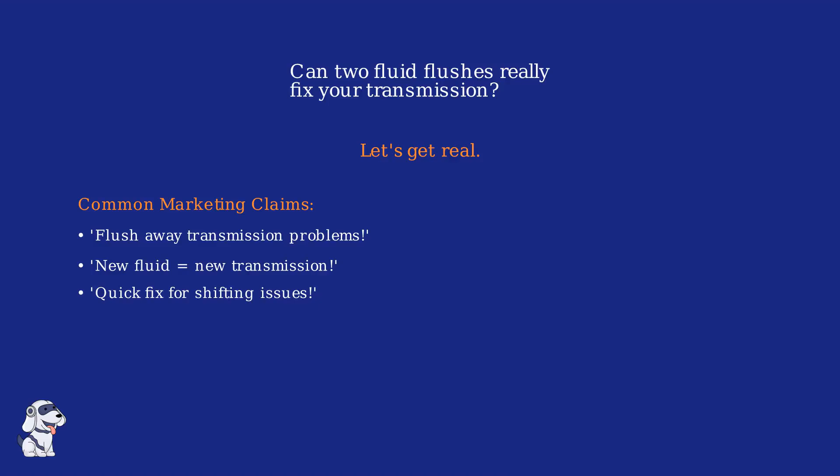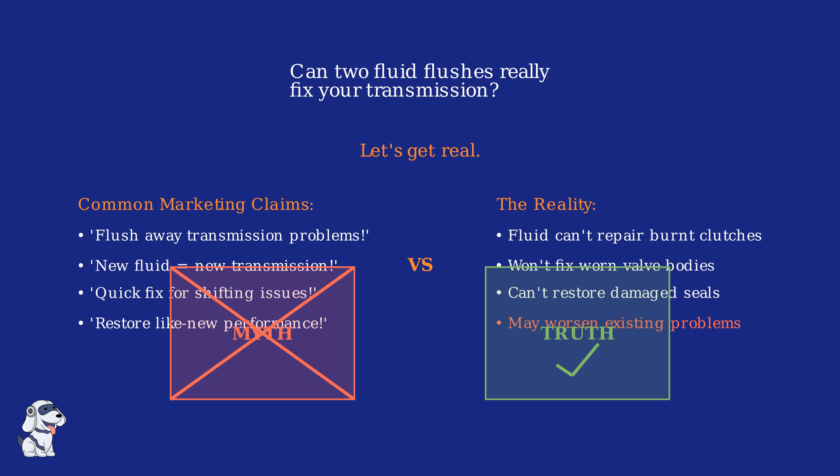Let's get real. Quick-lube chains and manufacturers push the myth that flushing transmission fluid will magically solve all your problems. The truth is, if your transmission is already damaged, new fluid won't repair burnt clutches, worn valve bodies, or damaged seals. In fact, flushing a neglected transmission can make existing problems worse by dislodging debris that clogs critical components.

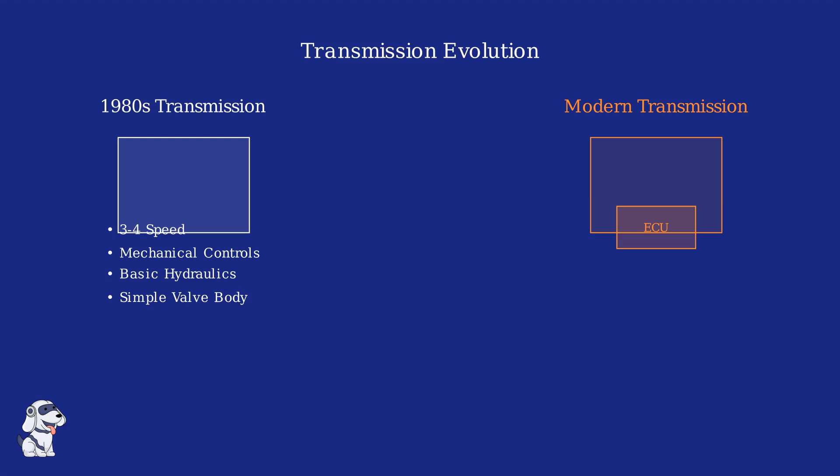Modern transmissions are more complex and fragile than ever before. While 1980s transmissions had 3 to 4 speeds with simple mechanical controls, today's transmissions feature 8 to 10 speeds, electronic management systems, adaptive learning, and dozens of sensors. This complexity creates tight manufacturing tolerances, electronic failure points, software calibration issues, and heat-sensitive materials that make modern transmissions far more vulnerable to problems.

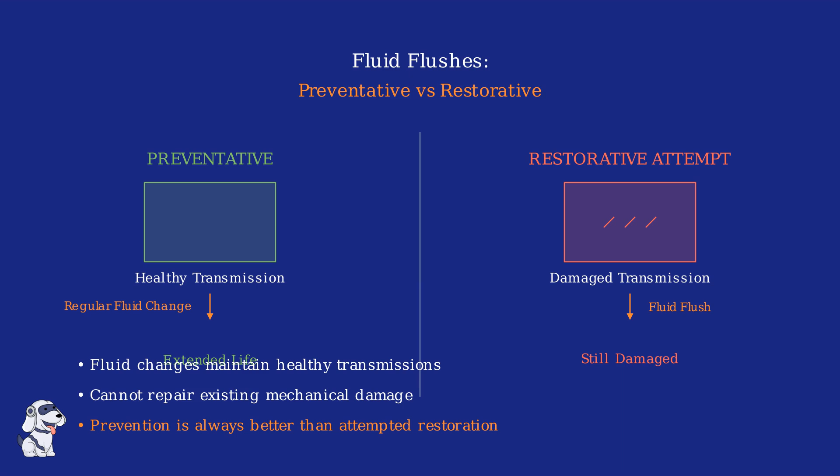Transmission fluid flushes serve one primary purpose: prevention, not restoration. A healthy transmission benefits from regular fluid changes that extend its lifespan. However, once mechanical damage occurs, no amount of fresh fluid can repair burnt clutches, worn gears, or damaged seals. The fluid flush becomes ineffective because the underlying problems are mechanical, not fluid-related.

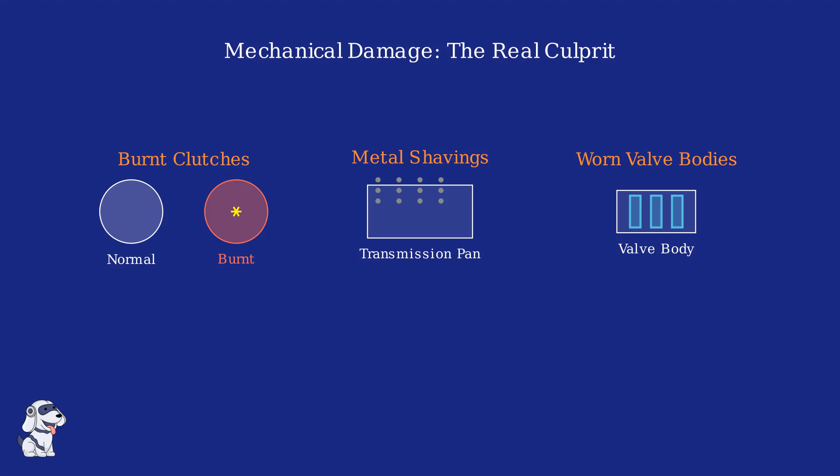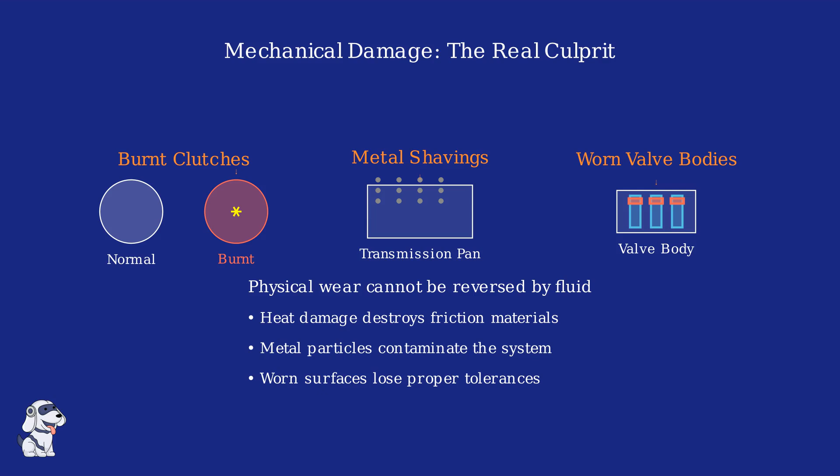Transmission damage occurs mechanically. Clutches burn from excessive heat, creating permanent friction material loss. Metal shavings accumulate in the oil pan from worn gears and components. Valve bodies develop scoring and wear that affects hydraulic pressure control. These physical failures cannot be reversed by simply adding new fluid.

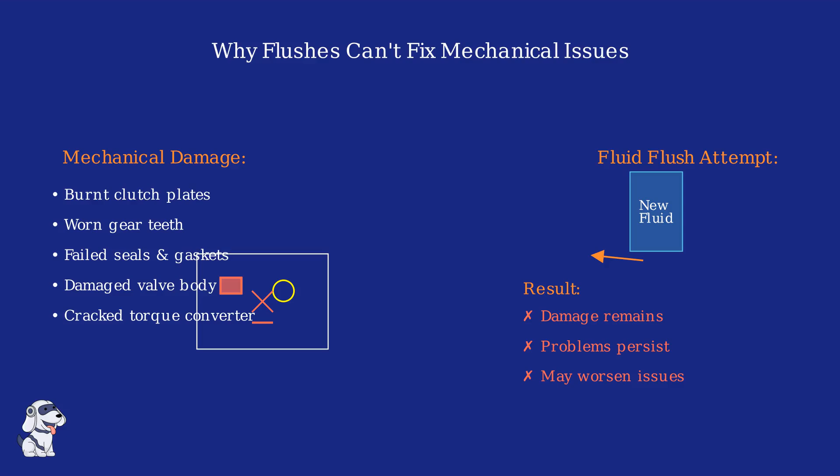Transmission damage occurs mechanically. Clutches burn, gears wear down, and seals fail. These are physical problems that new fluid simply cannot repair. It's like putting fresh oil in a blown engine. The underlying damage remains unchanged.

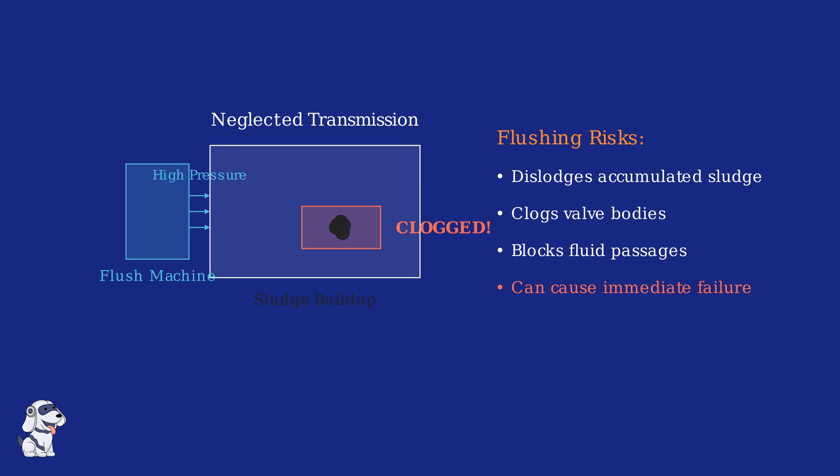Flushing a neglected transmission with years of sludge buildup creates serious risks. The high-pressure flush dislodges accumulated debris that then clogs valve bodies and fluid passages, often causing immediate transmission failure where none existed before. There's a crucial difference between a fluid change and a flush.

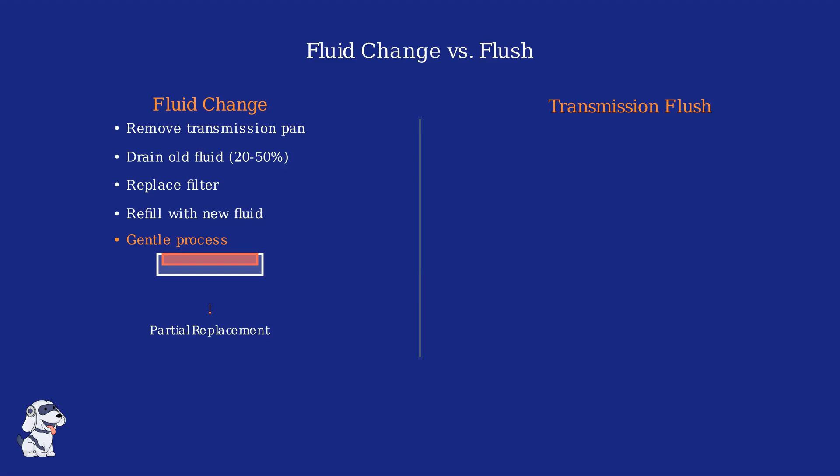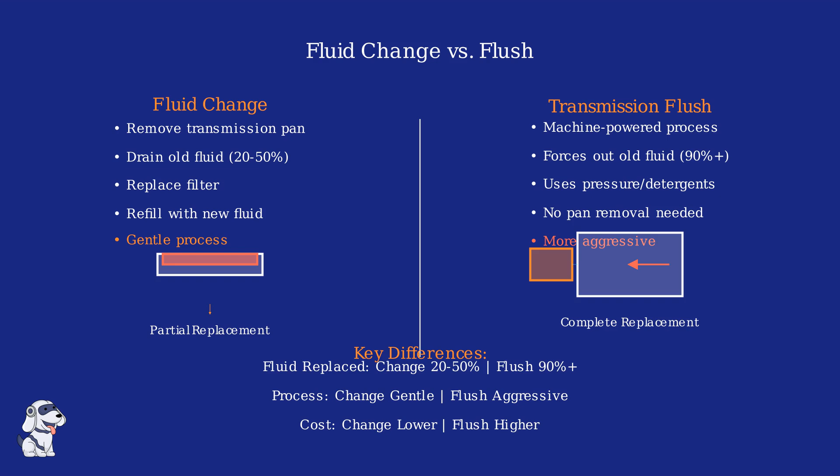A fluid change removes the pan, drains 20 to 50% of old fluid, replaces the filter, and gently refills. A flush uses machine pressure to force out 90% or more of the fluid without removing the pan. While flushes replace more fluid, the aggressive process can dislodge debris in neglected transmissions.

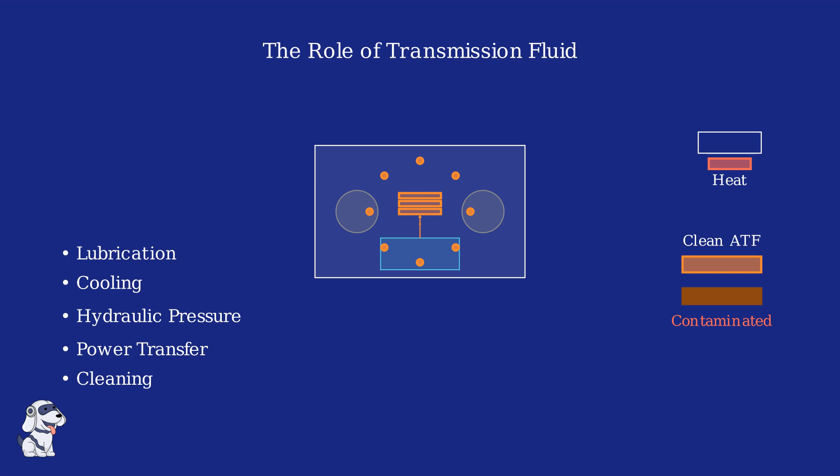Transmission fluid serves 5 critical functions in your transmission. It lubricates moving parts, dissipates heat, provides hydraulic pressure for shifting, transfers power through the torque converter, and carries away contaminants. When fluid degrades, all these functions suffer, but replacing fluid cannot repair mechanical damage that has already occurred.

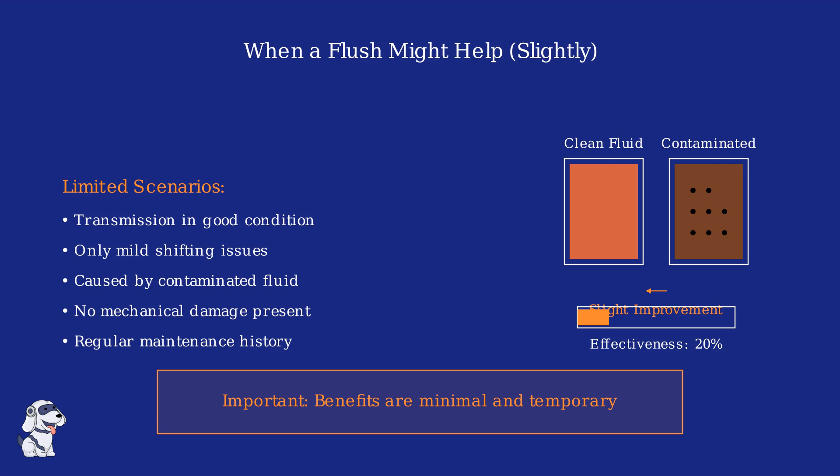A transmission flush might provide slight improvement in very specific scenarios. If your transmission is in good condition with only mild shifting issues caused by contaminated fluid, a flush could help marginally. However, the transmission must have no mechanical damage and a history of regular maintenance. Even then, the benefits are minimal and temporary, with only about 20% effectiveness.

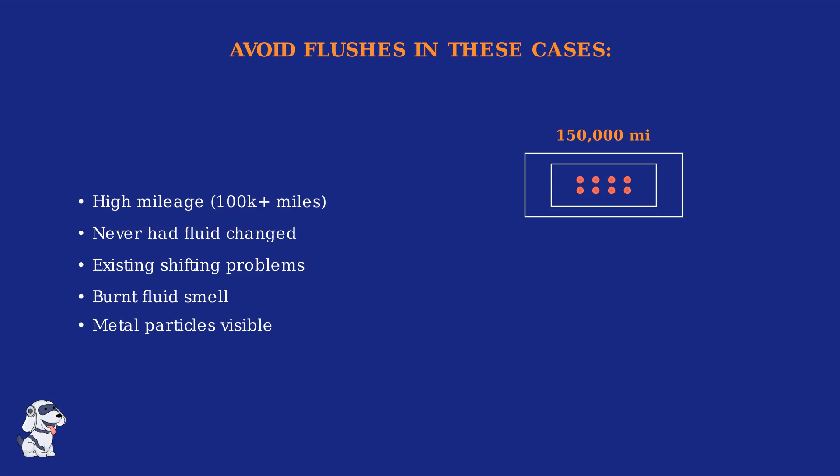There are specific situations where a transmission flush should be avoided altogether. High-mileage vehicles over 100,000 miles that have never had fluid changed are prime candidates for problems. The flush can dislodge accumulated sludge and debris, clogging valve bodies and making existing issues worse.

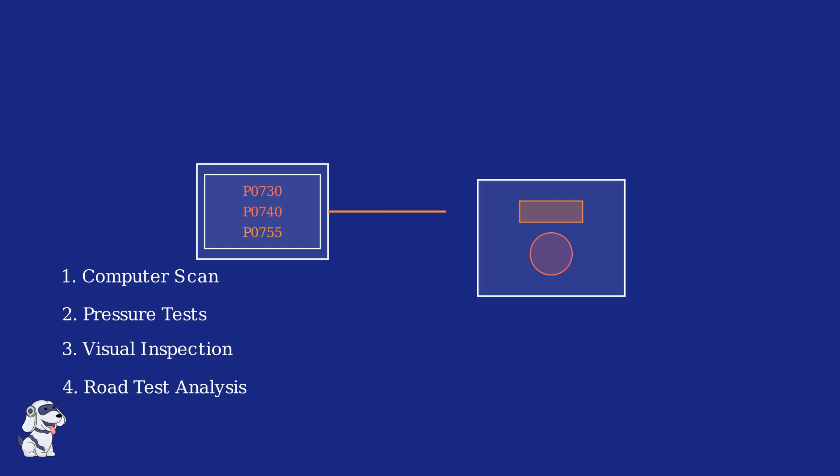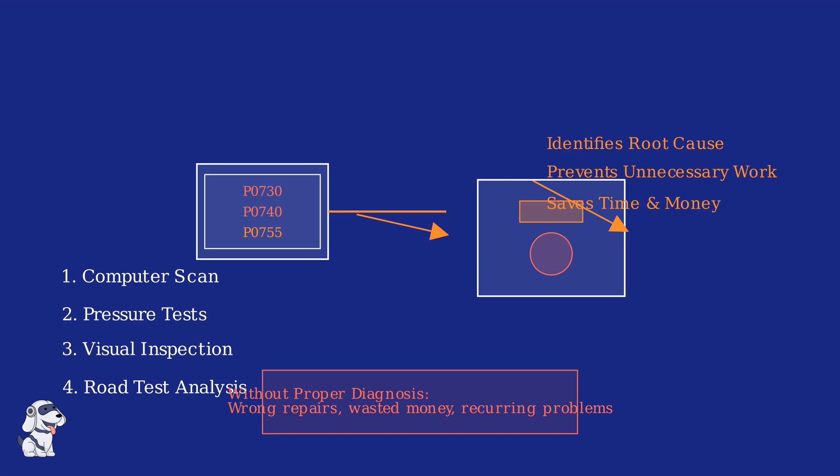Proper diagnostics are the foundation of any successful transmission repair. Before touching a single component, experienced technicians use computer scans, pressure tests, visual inspections, and road test analysis to identify the exact root cause. This prevents unnecessary work, saves time and money, and ensures the right fix the first time. Without proper diagnosis, you risk wrong repairs, wasted money, and recurring problems.

Many reputable shops are moving away from traditional flushes toward comprehensive transmission services. Instead of forcing fluid through with high pressure, modern services use multiple drain and fill cycles, replace filters, and inspect components. This gentler approach replaces more fluid while allowing technicians to actually see what's happening inside your transmission.

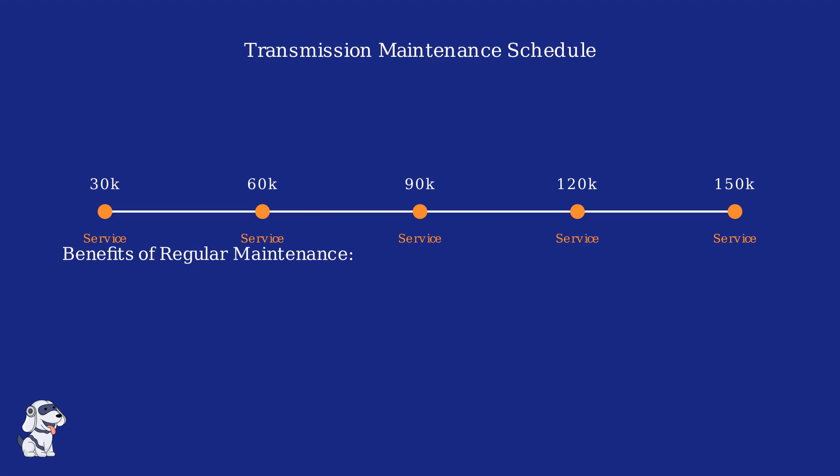Regular preventative maintenance is the key to transmission longevity. Following manufacturer intervals every 30 to 60,000 miles prevents damage before it starts. Maintained transmissions last over 200,000 miles, while neglected ones fail around 80,000. The choice is simple: invest in maintenance now or pay for expensive repairs later.

The transmission repair market is experiencing unprecedented growth. Increasing vehicle ownership, longer vehicle lifespans, and the growing complexity of modern transmissions are driving billions in annual revenue. This expansion creates demand for specialized expertise and advanced diagnostic capabilities.

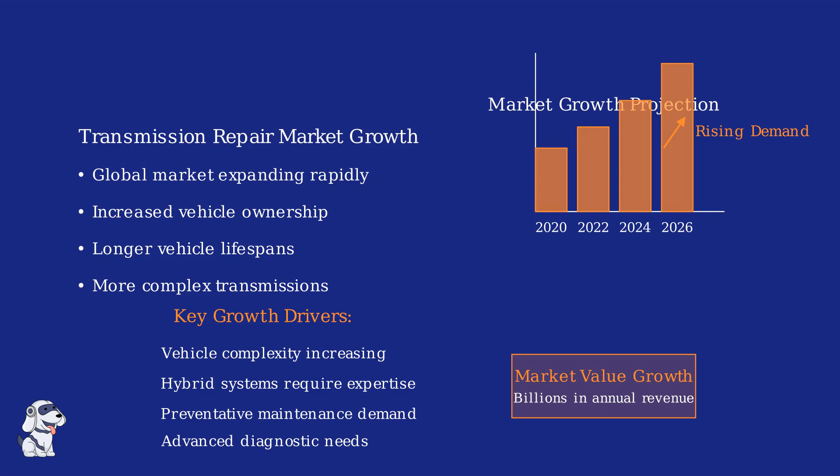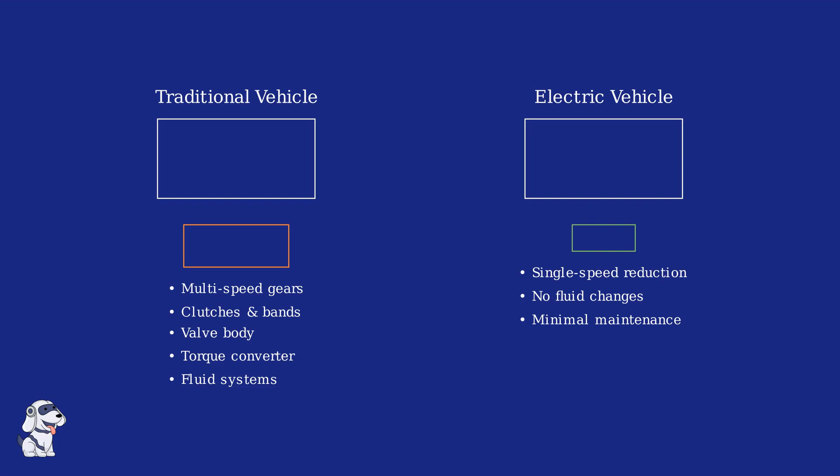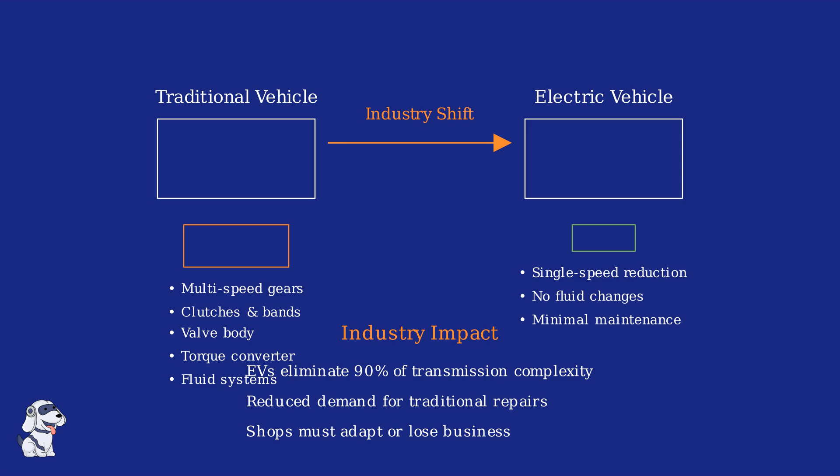Electric vehicles are fundamentally changing the transmission repair industry. While traditional vehicles require complex multi-speed transmissions with hundreds of moving parts, electric vehicles use simple single-speed reduction gears. This shift eliminates 90% of transmission complexity, dramatically reducing the need for traditional transmission repairs and forcing shops to adapt their business models.

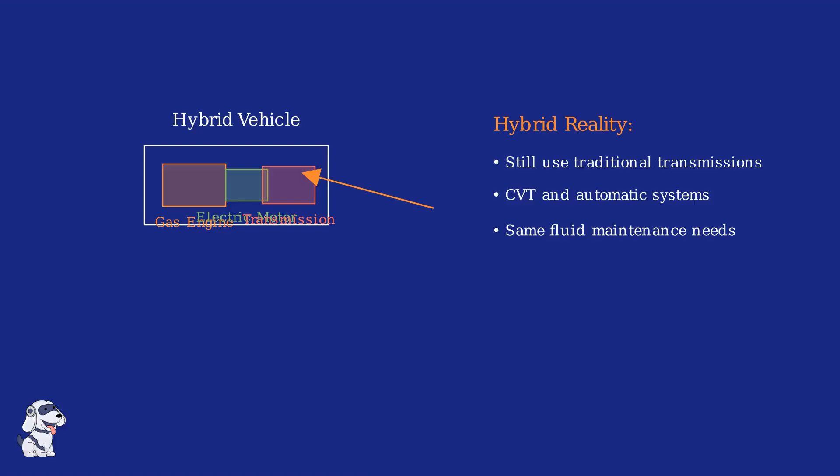While electric vehicles are growing, hybrid vehicles still rely on traditional transmissions. These complex systems combine gas engines with electric motors, but still need conventional automatic or CVT transmissions with all the same fluid maintenance requirements and potential failure points.

Today's transmission repair demands specialized skills far beyond traditional mechanical knowledge. Technicians must master electronics, software diagnostics, and high-voltage systems found in hybrid vehicles. Modern transmissions integrate complex computer controls, requiring advanced diagnostic equipment and programming expertise that separates qualified shops from basic service centers.

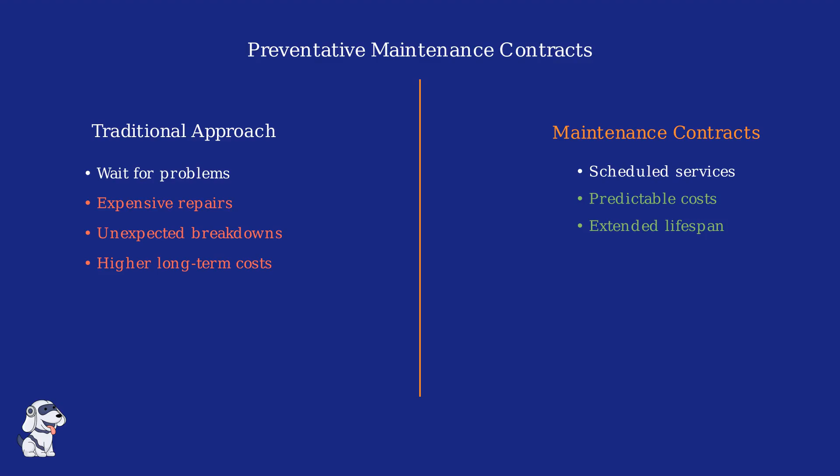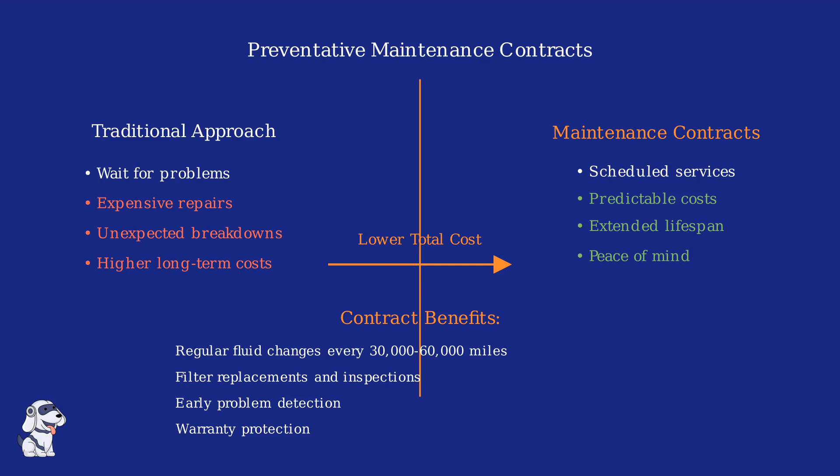The automotive industry is embracing preventative maintenance contracts as a smarter alternative to reactive repairs. Instead of waiting for transmission problems to occur, these contracts provide scheduled services, predictable costs, and extended vehicle lifespan through regular fluid changes, filter replacements, and early problem detection.

Advanced diagnostic tools have revolutionized transmission repair. Modern computer scanners, pressure testing equipment, and electronic monitoring systems can pinpoint exact failures, avoiding unnecessary work and providing accurate repair quotes that save both time and money.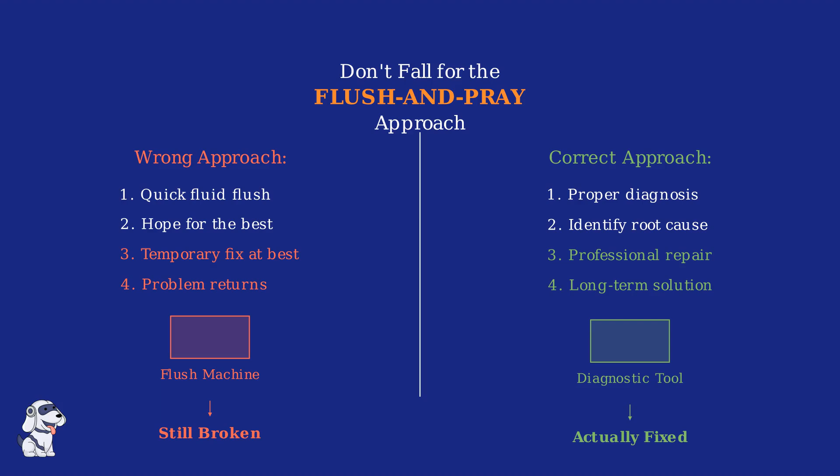Don't fall for the flush and pray approach that quick-lube shops promote. Real transmission problems require proper diagnosis and professional repair, not wishful thinking with fluid changes. When your transmission is damaged, only expert solutions will restore reliability.